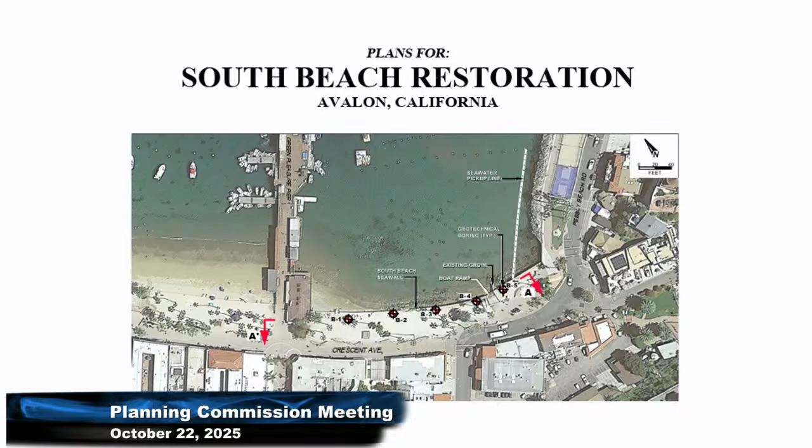South Beach goes up to where the historic boat ramp is. It's not being utilized because we've built the crane, but also there's a 4-foot drop-off from the boat ramp, so you couldn't launch a boat or even a kayak there, it's too steep. That's why we've put the guardrail around there so nobody would get injured.

To the right of that is known as either Muscle Beach or Palapa Beach, a couple local names for it. That white line along the revetment is our saltwater intake for the town, where the saltwater comes into our pump station, right in the elbow there, right where the ATM is. There are those 2 steel doors.

That's the saltwater pump station. And you see the little remnant of the groin there. It's probably 6 to 8 feet left of it, and it's probably 8 feet high, and that's right next to the boat ramp.

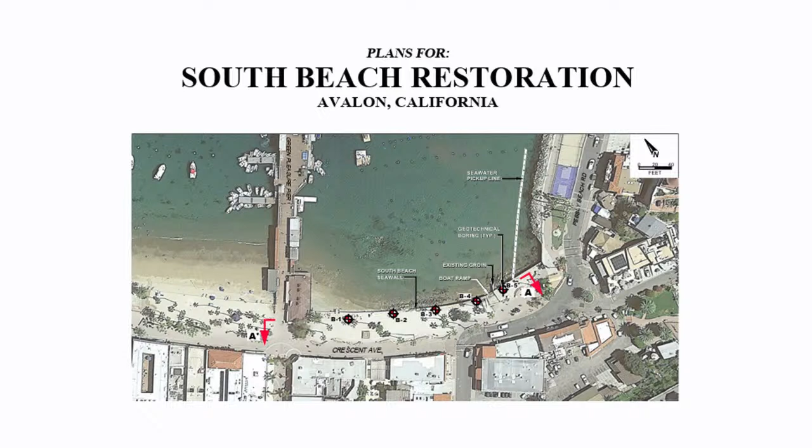As the current comes in, that current with the southeast wave, it hits the groin wall, then reflects back off it and completes a loop back into the pier. Whatever energy that's trying to erode the beach actually deposits sand right at the beach. So this is the perfect harmonious location and angle for that beach sand to stay there.

There's some science involved here, and also the grain size was selected so that it interacted with what was existing, because if you don't do that, it's not going to stay there. It needs to be big enough to stay there, but also small enough to move in and out with the waves. That was all part of the study.

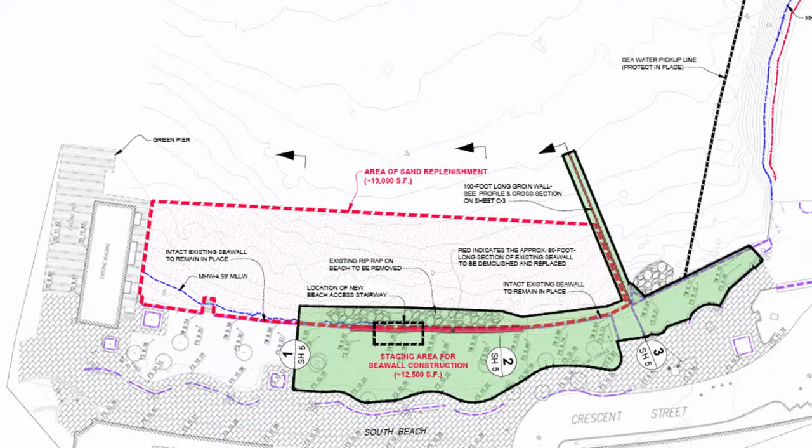A large crane would be required for the seawall and groin work, as this will involve driving precast concrete sheet pile that is 30 feet long. The beach will be closed during the project for safety and the construction operation work zone.

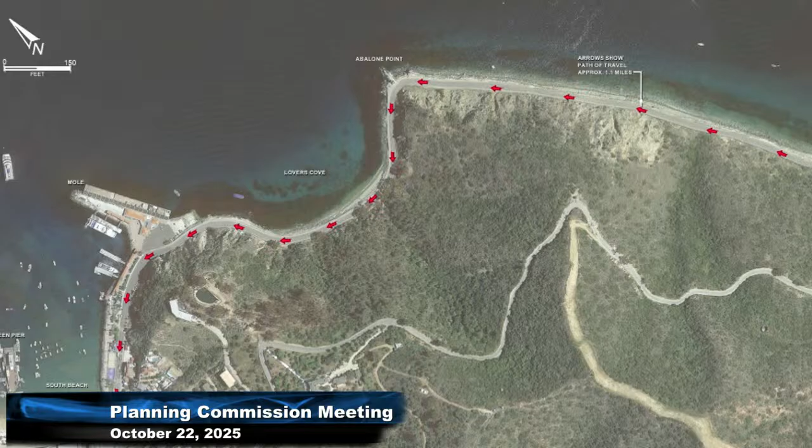This slide depicts the potential path of beach sand delivery. We have two alternatives. One, it would come on a barge and go directly to the beach, be dropped in the South Beach location, and then equipment that could work in the tidal zone could spread the sand. That's our preferred alternative, and it really depends on pricing and hitting the right timing with the visitor season. Another alternative is going over to the freight lines, bringing trucks in just like we do on every other project, and doing a sand haul. That's a lot of truck traffic and disruption, so we'd rather bring it in on the barge.

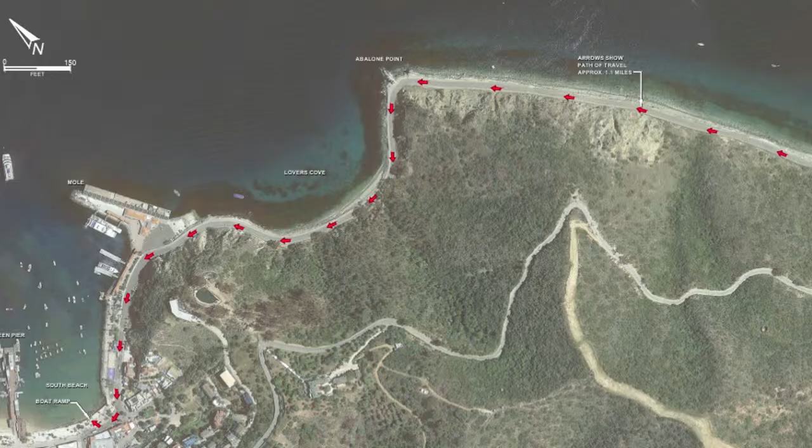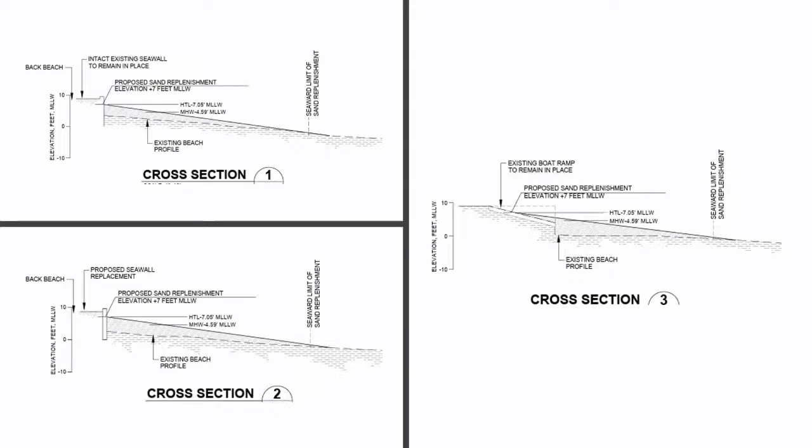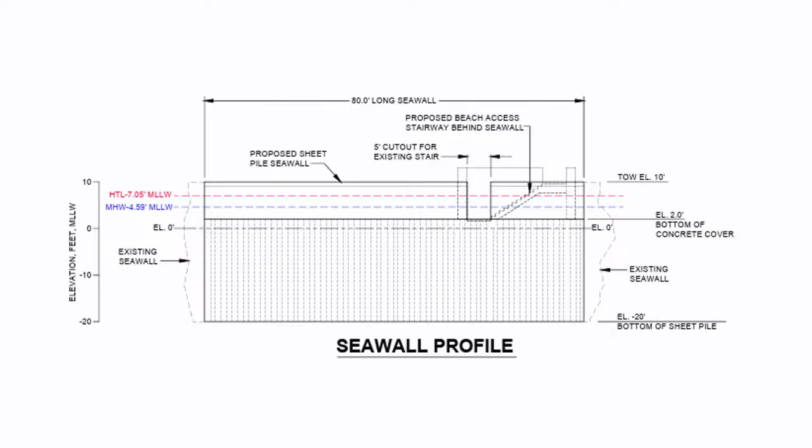This is a slide showing an elevation view of the seawall that we're going to replace, that 80 feet of seawall. You can see in the background the stairway and a little notch to get out there, so the steps will be protected from the ocean. To keep the access clean, you'll only have to clean that bottom area with sand if the sand gets that high. Otherwise, for the most part, when storms hit, it's all going to be concrete - concrete sheet pile surrounding it and a concrete stairway coming down. We see a good, long, useful life to this and low maintenance, and that's why we made this selection.

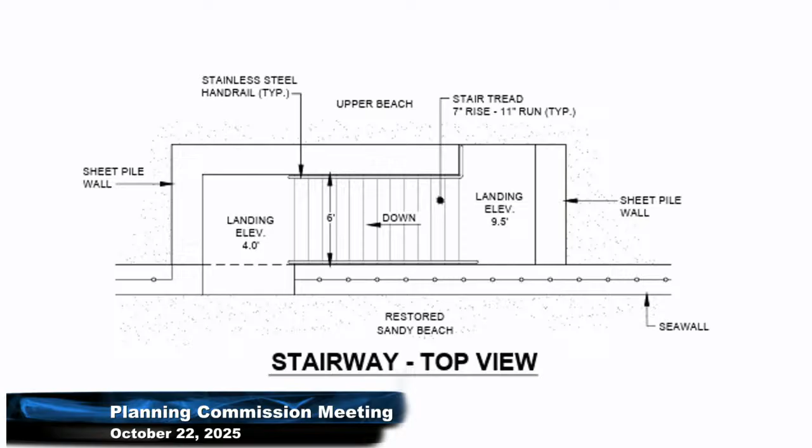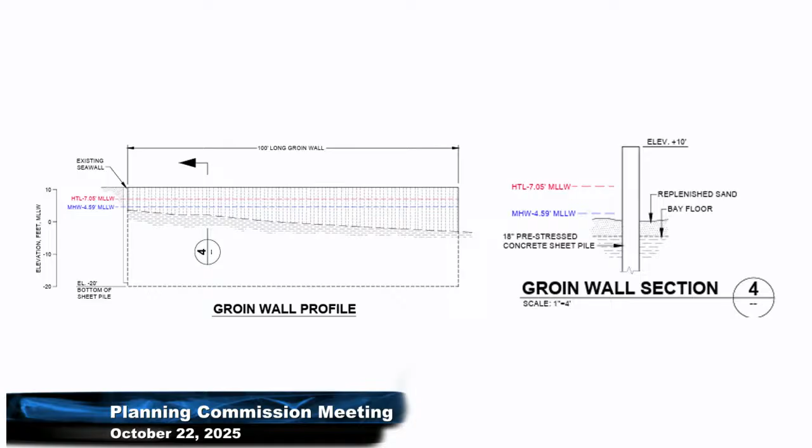This slide shows an elevation view of the groin wall. If I'm standing in the Avalon Channel outlet and looking back toward the pier, the seawall would be on my left, and you can see the sheet pile, 18 inch, being driven down, providing a level surface. That level surface is important because on top of the sheet pile we're going to put a concrete cap that finishes this all off. When you drive them, they get varying height and we have to cut them, so it's a little rough - this makes a nice smooth finish.

This one shows a 2-foot width. We also have an alternative for a 4-foot width, which can have guardrails down the side, 100 feet out, and at the end it could have a ramp connecting to a float approximately out to where the swim line is. You could have a recreation float with kayaks and stand-up paddle boards, giving access further out. So you can see why this is an access project for the shoreline, in addition to protecting against beach erosion and replacement of sand - it has all kinds of good features to it.

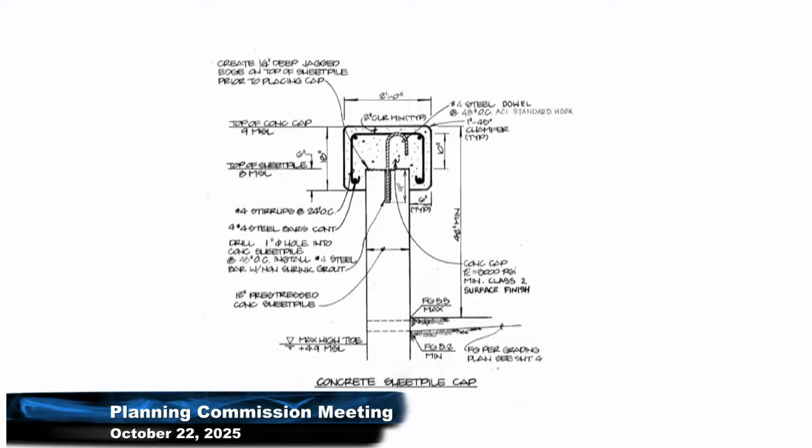So that concludes the presentation I have for you. Do you have any questions for me?

Is the boat ramp going to be on the pier side of the groin wall or the other side? It's on the pier side of the groin wall - it's there right now, we're using the existing features. When we're getting the permits, we're not trying to change the locations, we're altering the length and maybe the angle of the groin wall. But it's a little tricky getting all the permits from all the resource agencies. For mitigation, when we went out during emergency efforts to protect our seawall, we dumped some revetment rock over, and that worked very well for us. They're telling us now, even though we're putting sand on top, that's fill and they want that out of there. So all of those pieces are mitigation for us to get this project through the permit agencies.

When it's all done, will the fencing or railing that's there now along the seawall be gone? It'll look a lot more like Middle Beach - that doesn't need to be there. We put that there because somebody actually fell off, and conditions were getting worse, so that's when we decided it needed to be extended further along there. That was a temporary rail - we thought we'd be done with this project before that.